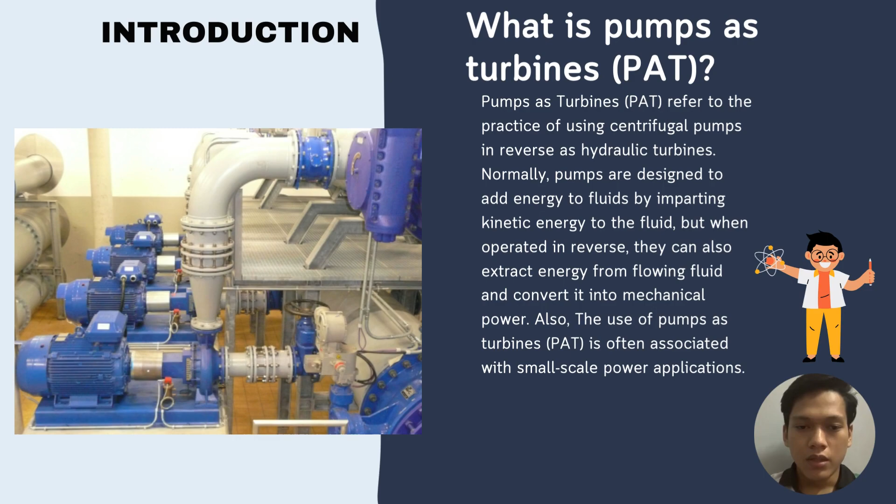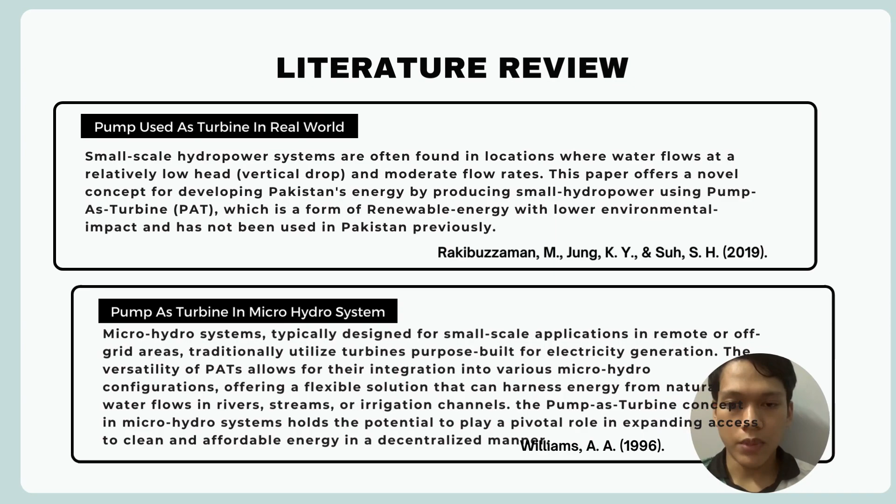For the literature review, number 1 is pump used as turbine in the real world. In the real world, small-scale hydropower systems are often found in locations with relatively low head and moderate flow rates. This paper offers a novel concept for developing Pakistan's energy by producing small hydropower using pump as turbine, a form of renewable energy with lower environmental impact that has not been used in Pakistan previously.

So as we know, pump as turbine is environmentally friendly, so it is very suitable for rural areas like Pakistan.

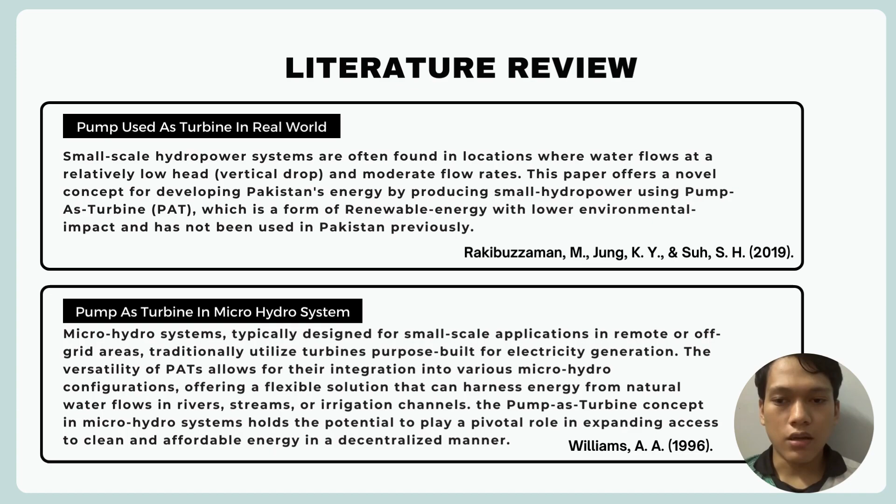Literature review number 2 is pump as turbine in micro hydro systems. Micro hydro systems are typically designed for small-scale applications in remote off-grid areas, traditionally utilizing purpose-built turbines for electricity generation. For versatility, PATs allow integration into various micro hydro configurations, offering a flexible solution that can harness energy from natural water flow like rivers, streams, or irrigation channels. So the pump as turbine concept in micro hydro systems holds the potential to play a pivotal role in expanding access to clean and affordable energy in a decentralized manner.

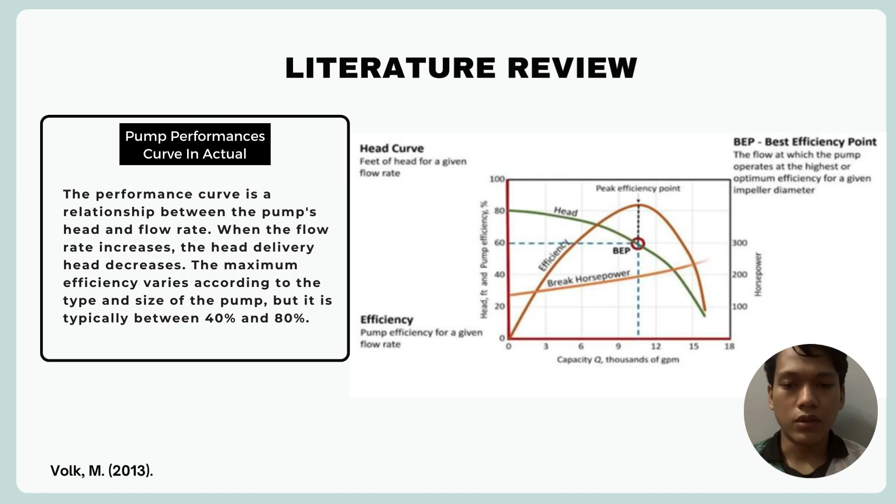Literature review number 3 is pump performance curve in actual application. The performance curve shows the relationship between the pump's head and the flow rate. As you can see in the diagram, when the flow rate increases, the delivery head decreases. The maximum efficiency varies according to the type and size of the pump. The intersection point is where the actual operating flow rate, operating head, and efficiency meet. Typically this efficiency is between 40% and 80%. This reference is from Volk M.

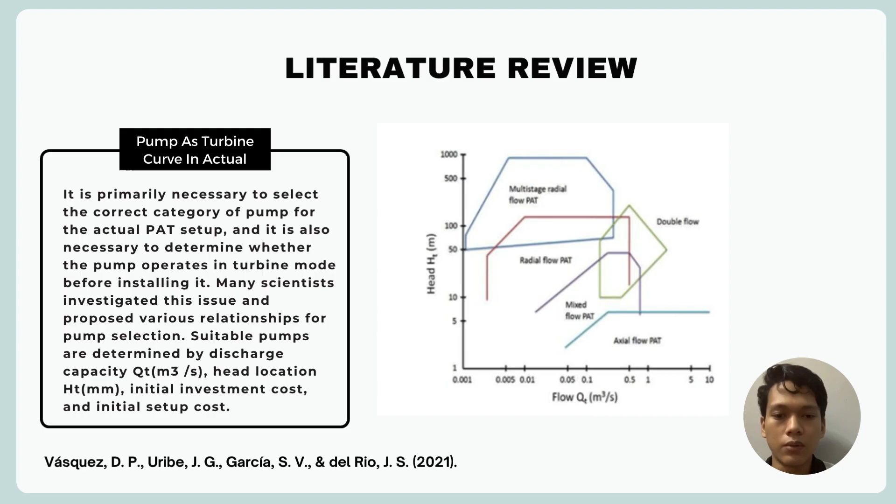Next is theory. There are two theories in our presentation. Firstly, pump as turbine is a renewable energy system idea based on cleverly reversing the standard pump function in order to capture the kinetic energy of flowing fluid for power production. So basically, we use a typical pump and change it into a turbine to produce power.

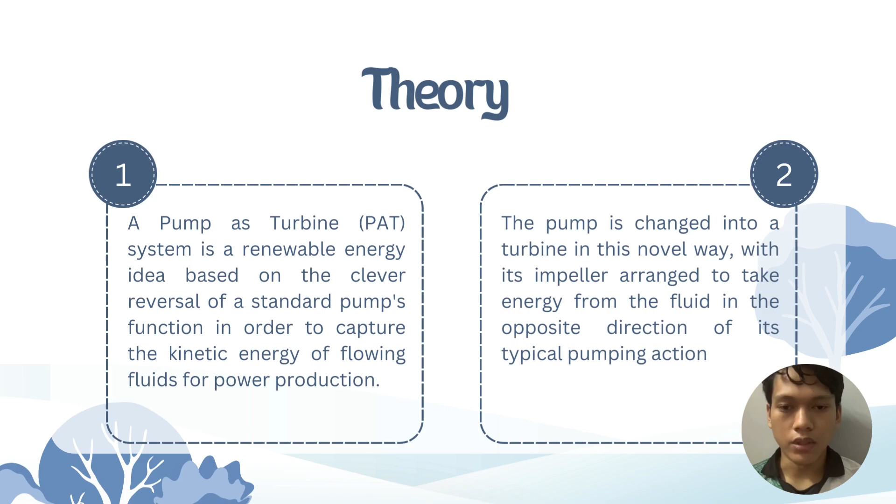The second theory is that the pump is changed into a turbine in this novel way, with its impeller arranged to take energy from the fluid in the opposite direction of its typical pumping action. Basically, in a normal pump, the fluid receives energy from the pump. But for theory number 2, we change the pump into a turbine, so the fluid gives power to the turbine, which is changed into mechanical power and then into electrical power.

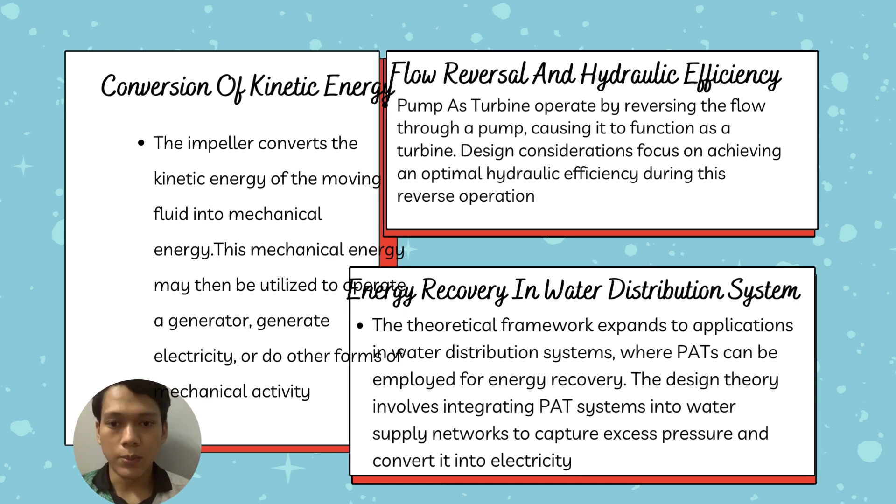So next is conversion of kinetic energy. So the impeller converts the kinetic energy of the moving fluids into mechanical energy. So this mechanical energy may then be utilized to operate a generator and then generate electricity or do other forms of mechanical activity.

So number 2 is flow reversal and hydraulic efficiency. So pump as turbine, as we know, operates by reversing the flow through a pump, so causing it to function as a turbine. So design consideration is focused on achieving optimal hydraulic efficiency during this reverse operation.

And next is energy recovery in water distribution system. So the theoretical framework expands to applications in water distribution systems where PATs can be employed for energy recovery. So the design theory involves integrating PAT systems into water supply networks to capture excess pressure and convert it into electricity.

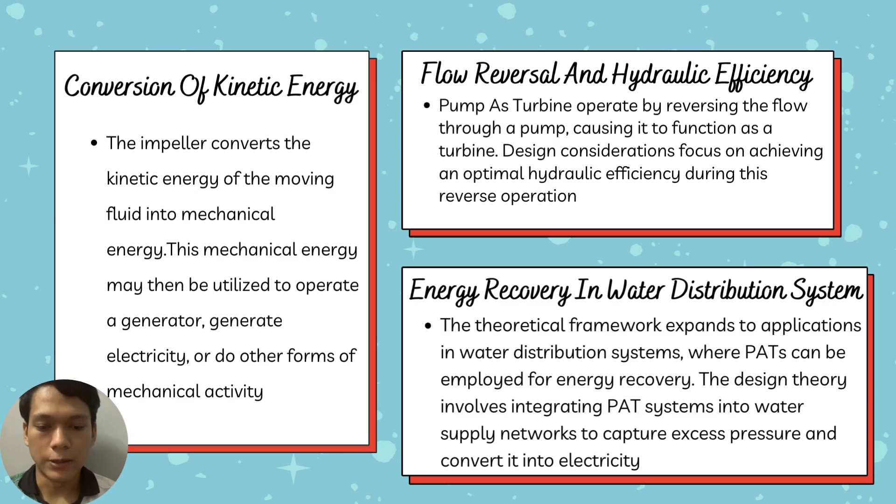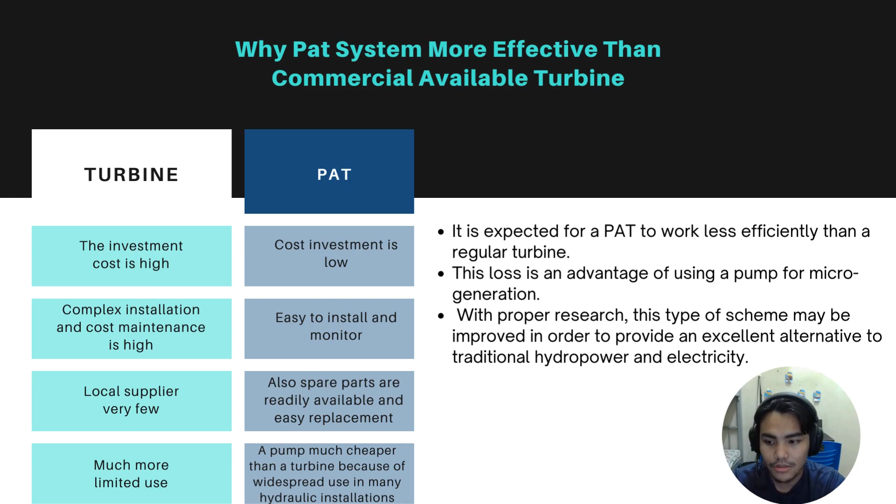For turbines, there are very few local suppliers, and a pump is much cheaper than a turbine because of its widespread use in many hydraulic installations, while the turbine has much more limited use.

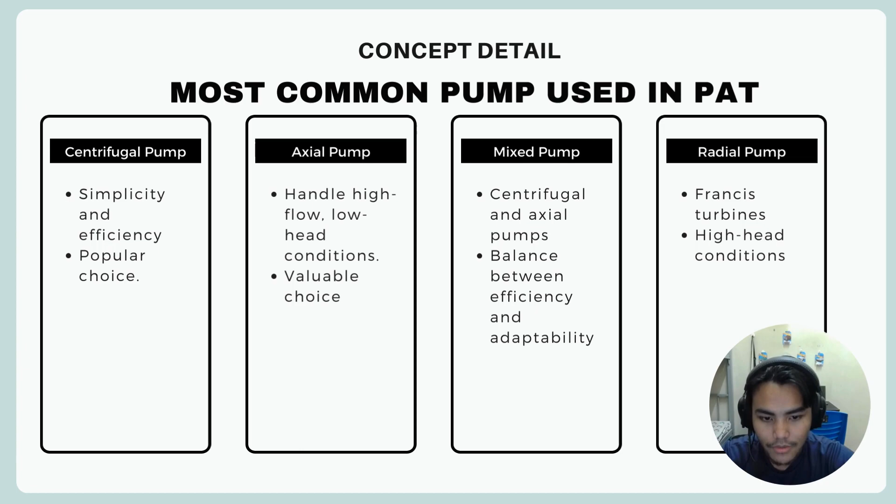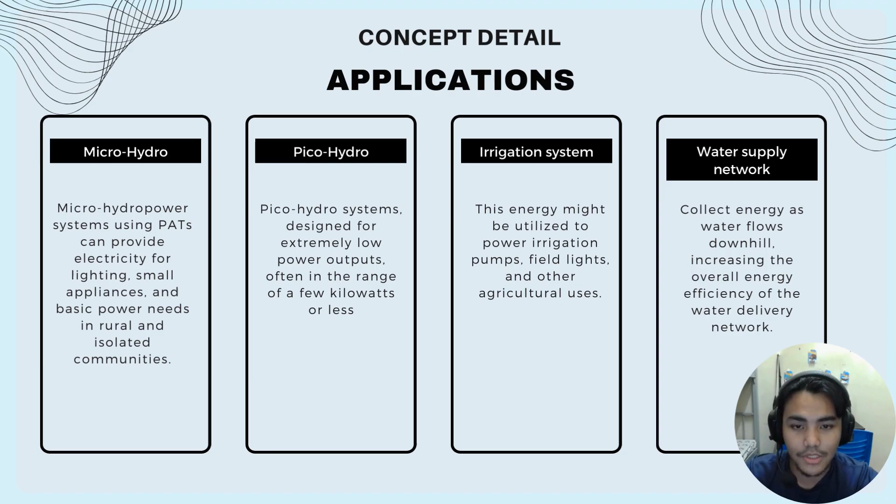So for this slide, I will talk about the applications. The first one is micro hydro, which is the primary application of PAT systems. These systems harness the power of flowing water in small-scale hydroelectric setups, providing a reliable and renewable energy source for remote or off-grid communities. The next one is pico hydro.

These systems are designed to generate power in low flow, low head conditions, making them suitable for decentralized energy solutions in rural areas. The next one is irrigation system. So for irrigation systems, as water flows through a turbine, it not only generates electricity but also aids in pressurizing water for irrigation purposes.

So the last one is water supply network. So PAT systems are increasingly being integrated into water supply networks.

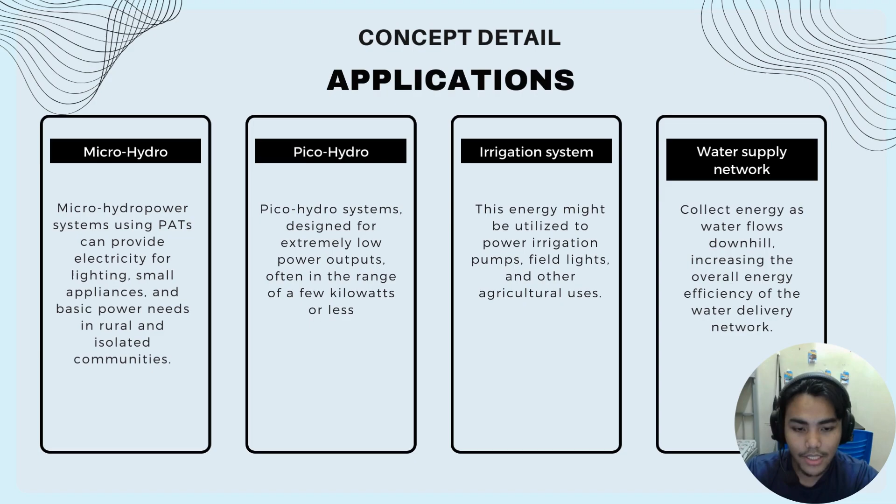The application is by harnessing excess pressure in pipelines. These systems generate electricity while maintaining a reliable water supply.

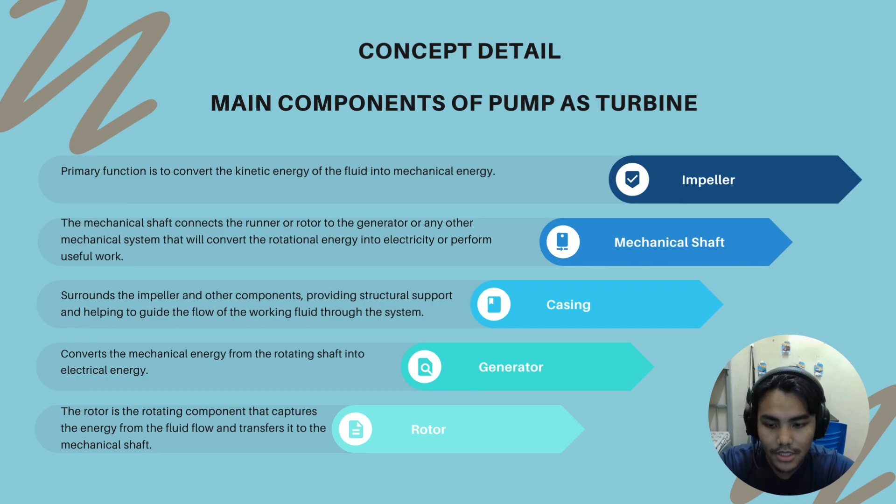The casing surrounds the impeller and other components, providing structural support and also helping to guide the flow of the working fluid through the system. The generator converts the mechanical energy from the rotating shaft into electrical energy. The rotor is the rotating component that captures the energy from the fluid flow and transfers it to the mechanical shaft.

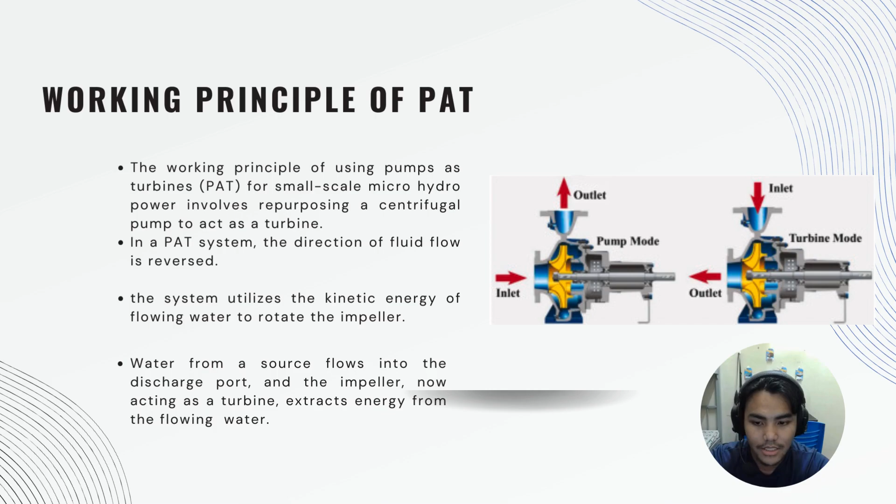So the system utilizes the kinetic energy of flowing water to rotate the impeller. Water from a source flows into the discharge port and the impeller, now acting as a turbine, extracts energy from the flowing water. For conservation of energy in PAT, as water passes through the impeller, the kinetic energy of the flowing water is converted into mechanical energy, causing the impeller to rotate. The rotation of the impeller is transferred to a shaft connected to a generator, which, as I said before, converts the mechanical energy into electrical energy.

So the impeller interaction. The impeller is a critical component of the pump, in charge of receiving kinetic energy from the moving fluid. The impeller's blades contact the water as it enters the PAT system, causing the impeller to revolve. Next is mechanical energy conversion. The rotation of the impeller converts the kinetic energy of the flowing fluid into mechanical energy. The mechanical energy generated by the impeller is then transferred to the shaft connected to a generator or other mechanical components.

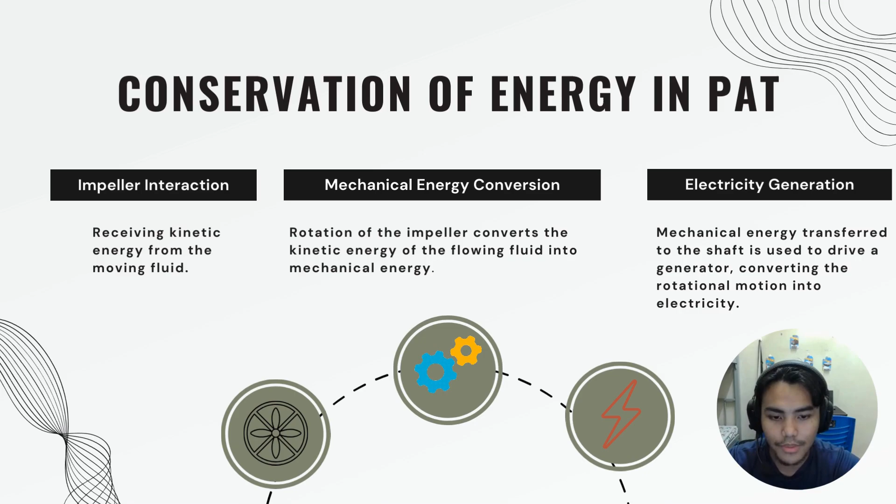The last one is electricity generation. The mechanical energy transferred to the shaft is used to drive a generator, converting the rotational motion into electricity. Alternatively, the mechanical energy can be employed to perform various types of mechanical work depending on the specific applications.

My name is Madison. For the project detail, in this project, we designed a pump as turbine using a centrifugal pump. As we can see in the picture, this one is the generator, fitted to the pump at the inlet and the outlet. The pump is the main component used in this project. The use of a centrifugal pump as turbine may minimize the installation cost.

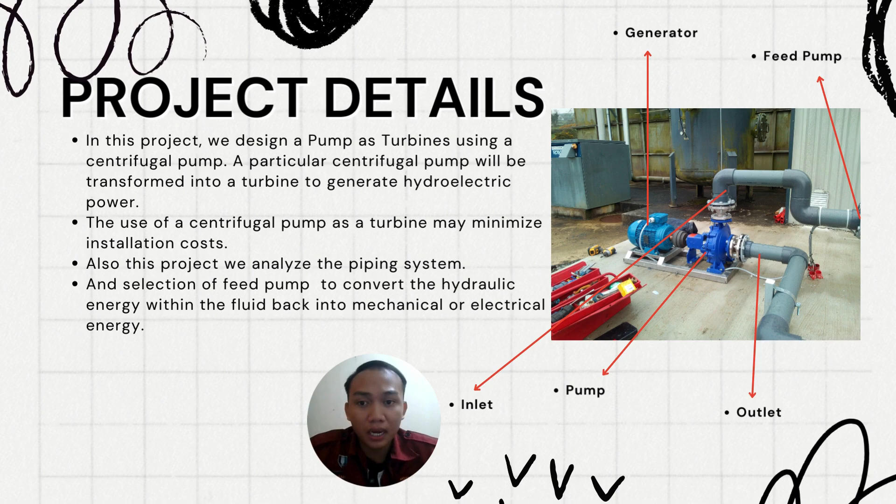Also, in this project we analyze the piping system and the selection of the pump, which as I mentioned before is to convert the hydraulic energy within the fluid into mechanical or electrical energy. We go through the performance equation. So this is our designed pipeline system for a small-scale pump as turbine that we apply in our project.

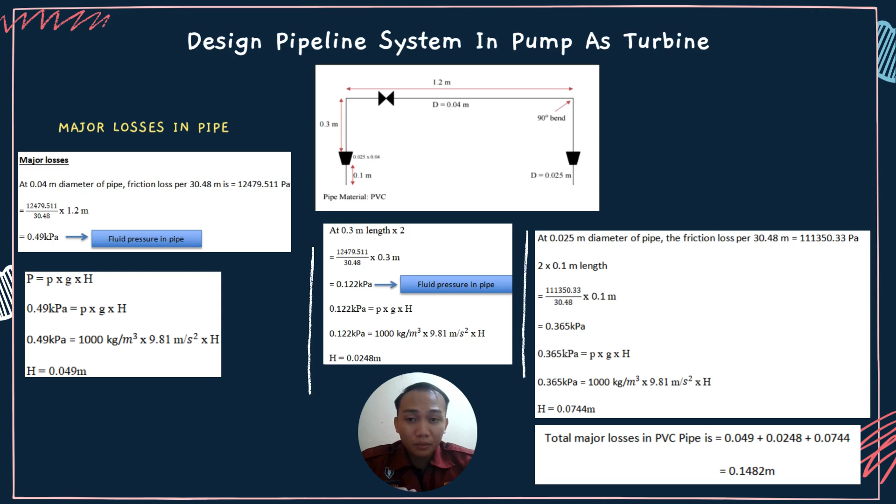First, we calculate the major losses that occur in our pipeline system. For this pipeline system, we use PVC pipe as our experimental setup, taken from the case study. First, we calculate the head of the pipe using the formula P = ρgh, and after that, we calculate the total major losses in the PVC pipe, which we get as 0.1482 meter.

Then the minor losses in the pipe: the pump piping system has two 90-degree bends, so loss occurs at fittings, including the expansion in the pipe. The head loss at the expansion fitting that we calculate is 0.152 meter using the head loss equation, and to determine the velocity, it is equal to flow rate divided by area.

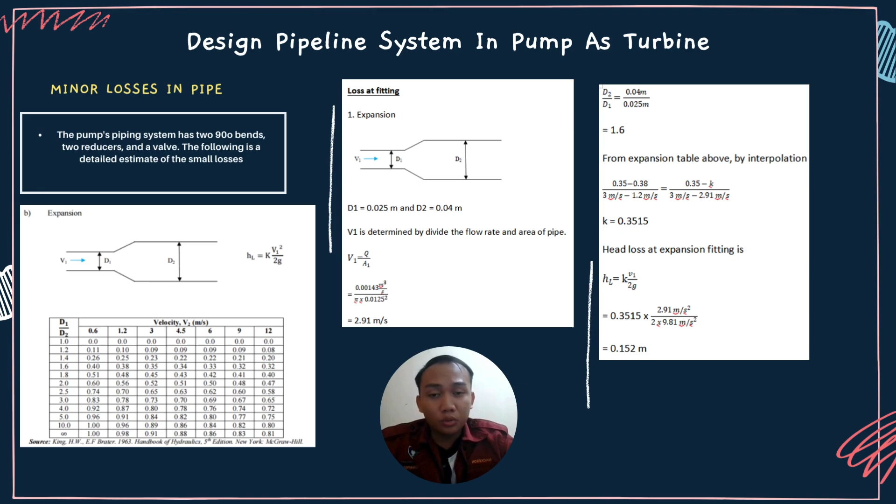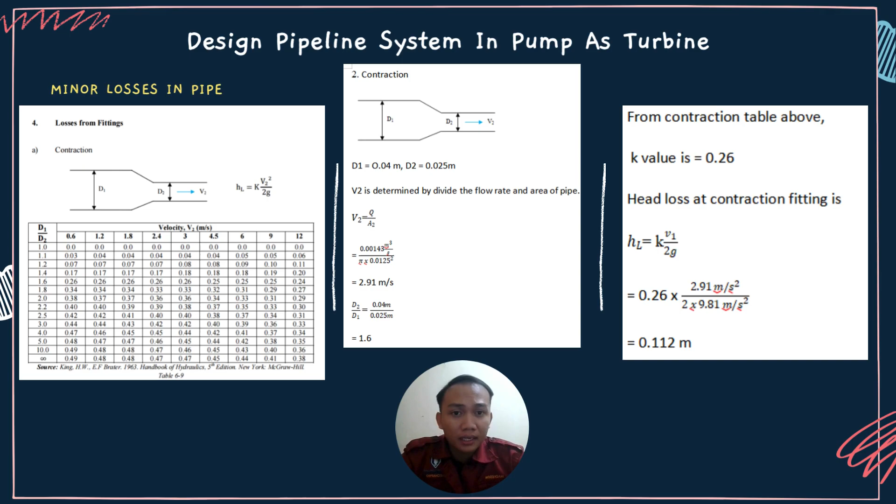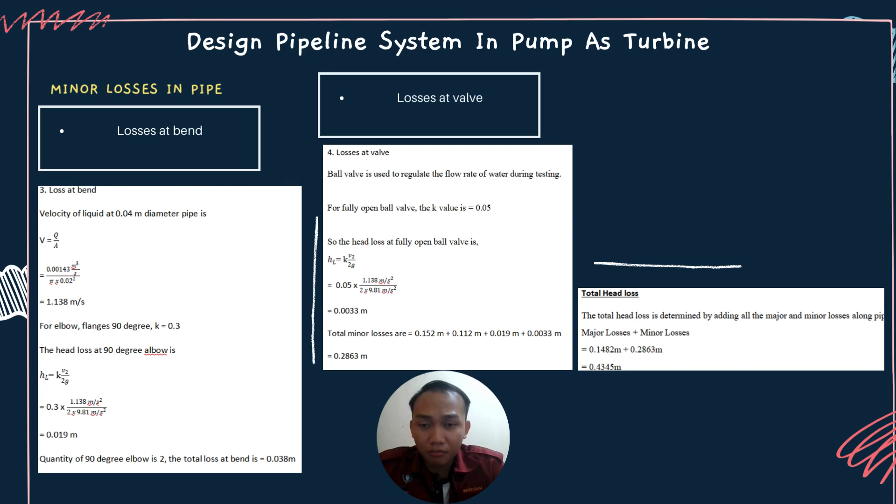Next, we calculate the loss from fitting and contraction in the pipe, using the same formula that we apply to calculate the expansion in the pipe. The head loss at the contraction fitting that we calculate is 0.112 meter. Next are other minor losses in the pipe, which are losses at bends and losses at valves. So the total head loss is determined by adding all the major and minor losses along the pipe, and we get 0.4345 meter in our pipeline system.

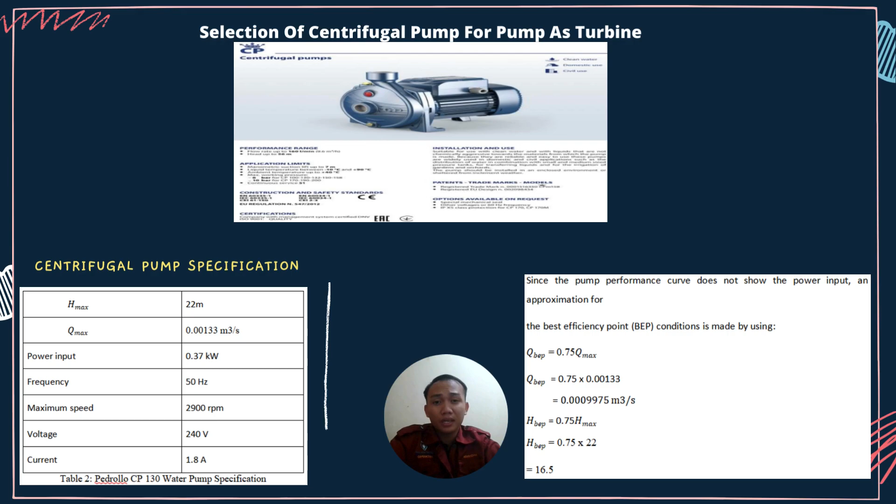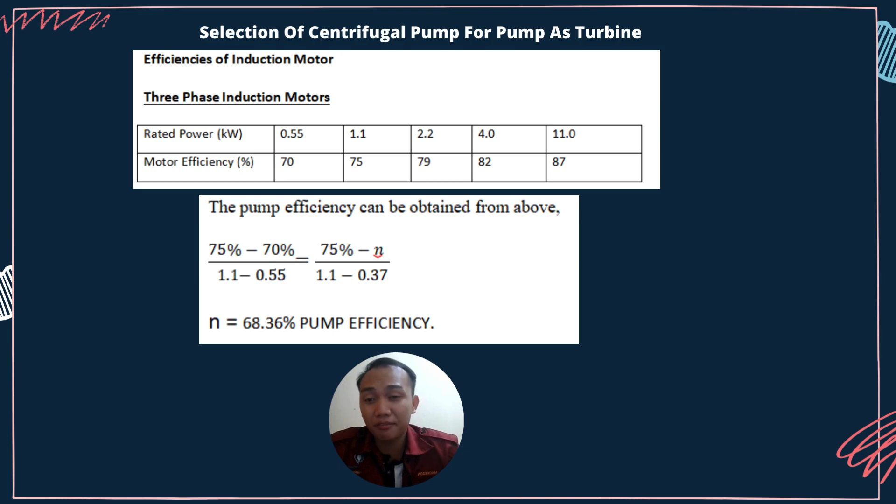Next is the selection of a centrifugal pump for pump as turbine. The model of centrifugal pump that we use is the Pedrollo CP 130 water pump. The flow rate at best efficiency point that we get is 0.0009975 cubic meter per second, and the head at best efficiency point that we calculate is 16.5. For the pump efficiency, we use a motor efficiency of 75 and rated power of 1.1 kilowatt. After we substitute all the values, we get a pump efficiency of 68.36.

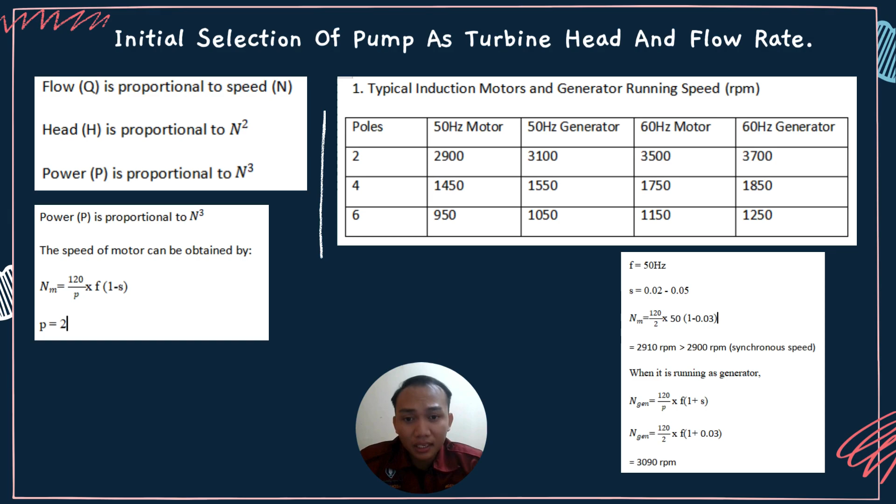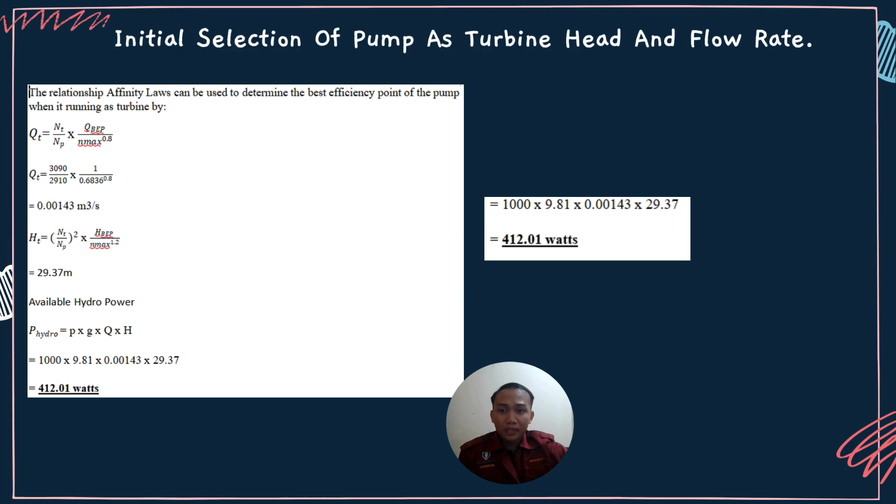Next is the initial selection of pump as turbine head and flow rate. The power is proportional to n power 3. So the speed of the motor that we obtain is 2910 rpm, and when it's running as a generator, the speed of the generator that we calculate is 3090 rpm. Next is the relationship of the affinity law that we use to determine the best efficiency point of the pump when it is running as a turbine, and we get the head of the turbine as 29.37 meter. So the available hydropower that we calculate is 412.01 watts.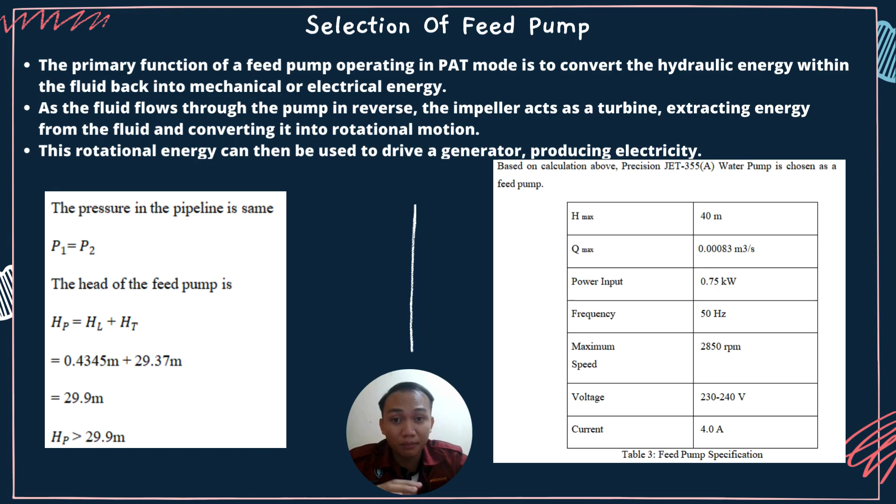Next is the selection of the feed pump. In this project, the feed pump that we use is the Precision JET-355(A). The primary function of the feed pump in PAT mode is to convert the hydraulic energy within the fluid into mechanical or electrical energy. As the fluid flow through the pump is reversed, the impeller acts as the turbine, extracting energy from the fluid and converting it into rotational motion. This rotational energy can be used to drive a generator and produce electricity.

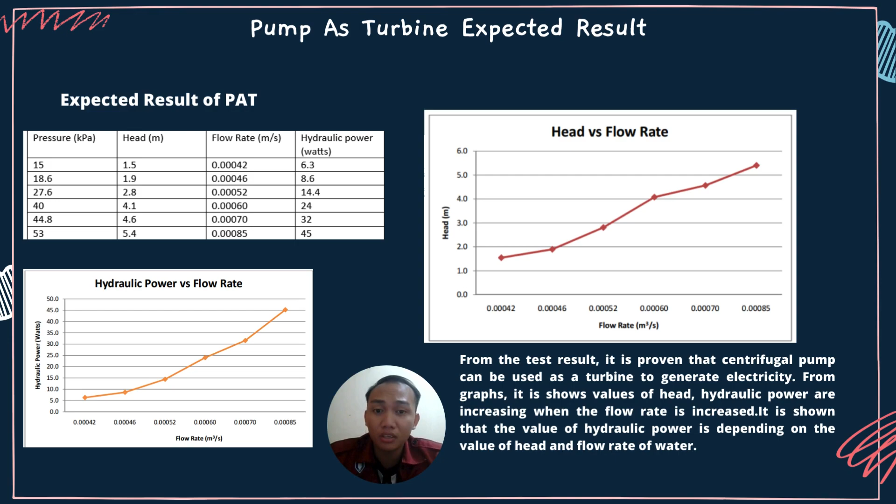Next is the pump as turbine expected result. From the test result, it's proven that a centrifugal pump can be used as a turbine to generate electricity. From the graph, it is shown that the values of head and hydraulic power are increasing when the flow rate is increased. It also shows that the value of hydraulic power depends on the value of the head and the flow rate of the water.

So we continue to the economic part. This is important to enhance the economic feasibility and sustainability of this project. The first point is long-term cost consideration. It can be achieved by developing a long-term financial plan that includes budgeting for maintenance, repairs, and potential system upgrades. This helps ensure the economic sustainability of the pump as turbine project over its life cycle. The second one is electricity tariff and revenue generation. We must explore available government incentives, subsidies, or grants for renewable energy projects. Many governments offer financial support to promote the adoption of sustainable technologies.

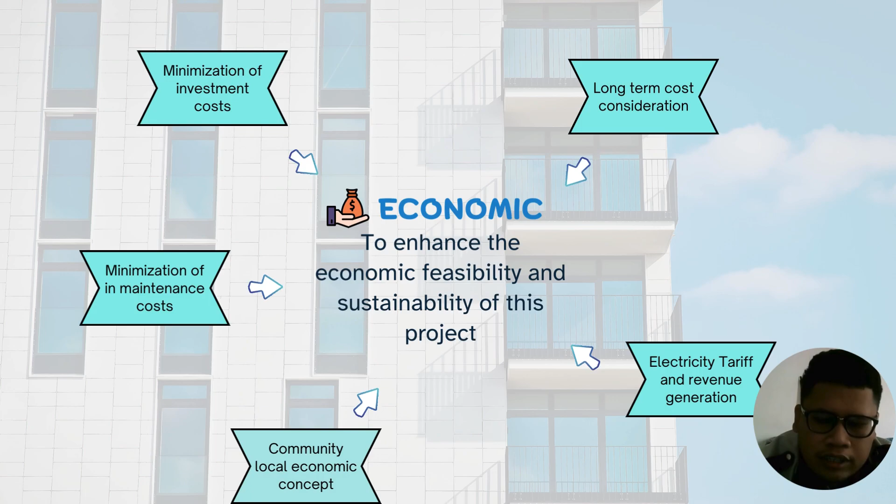Next is the community local economic concept. It involves local communities in the planning, implementation, and management of the PAT project. Community engagement fosters a sense of ownership and ensures the project aligns with the community's needs and priorities. The next one is minimization of maintenance costs. We can achieve that by implementing a remote monitoring and control system to facilitate real-time performance tracking. This allows for early detection of issues, proactive maintenance, and optimization of the PAT system efficiency. Lastly is the minimization of investment costs. We can get it by exploring innovative financing models such as public-private partnerships, community-based funding, or crowdfunding to secure the necessary capital for the project.

Okay, we continue to the pros of the pump as turbine. The first one is energy recovery, where it can be used in applications where fluid is being pumped, to capture energy that would otherwise be wasted during the braking process. The next one is environmental impact, making them more energy efficient. And also the pump as turbine does not release any waste to the environment. The third one is cost effective, because a pump as turbine is more affordable and less expensive than traditional turbines.

Lastly, the design is simple. The pump as turbine design is simpler than the traditional turbine design, so it leads to easier maintenance and lower manufacturing costs.

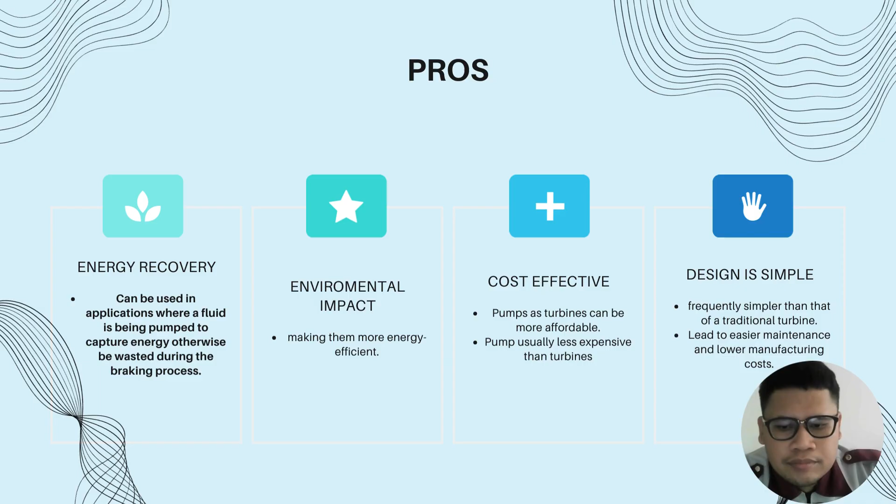So we move from the pros to the cons of the pump as turbine. Okay, the first one is lower efficiency. As we know, when combined, the pump and turbine typically have lower efficiency. Second one is cavitation risk. It will result in cavitation, which may harm the pump's internal parts.

Cavitation will occur when the liquid in a pump turns to a vapor at low pressure. It occurs because there is not enough pressure at the suction end of the pump, or insufficient net positive suction head. When cavitation takes place, air bubbles are created at low pressure. So when we combine the pump and turbine together, cavitation will occur.

Next is the limited performance analysis. It occurs because pump as turbine is not widely used in the industry, so it's challenging to predict their performance accurately. Lastly is the limited flow range. It's limited because of the limited operating range compared to turbines or the old turbines.

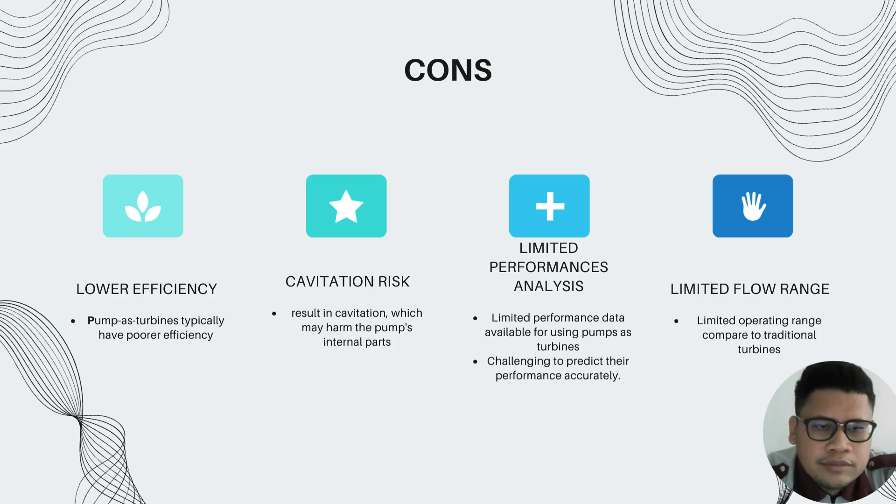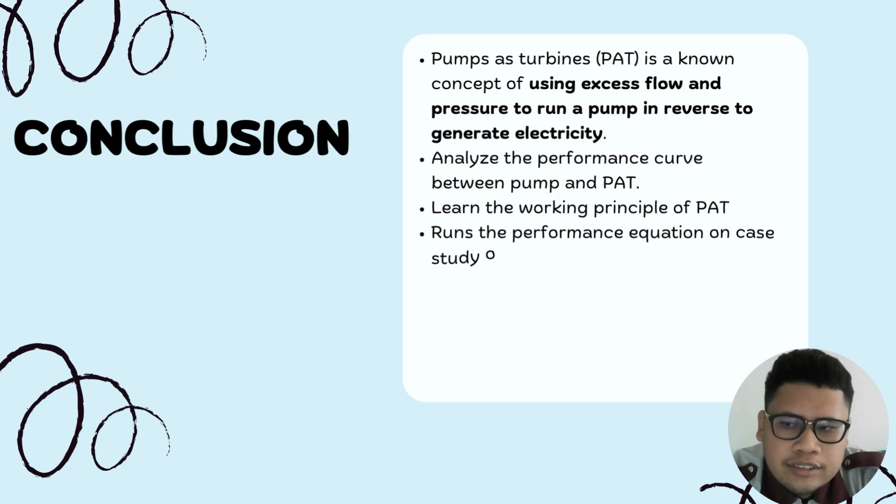So we move to the conclusion of our project. Okay, the first one is the pumps as turbines. PAT is a known concept of using excess flow and pressure to run a pump in reverse to generate electricity. And then we have analyzed the performance curve between the pump and the pump as turbine.

In summary, analyzing the performance curve between a pump and PAT involves understanding the characteristics of both devices, their individual performance curves, and identifying operating points for efficient energy conversion. This integration is valuable for energy recovery and also optimization in various applications.

Okay, the third one is we have learned the working principle of PAT and then ran the performance equation on a case study of pump as turbine in small scale. And next is we analyzed the economics of the pump as turbine industry.

So a comprehensive economic analysis in the pump as turbine industry involves evaluating capital and operational costs, assessing energy savings, calculating the return on investment, considering life cycle costs, addressing risks, and ensuring compliance with regulations. The decision based on these factors is crucial for the successful deployment and economic viability of a pump as turbine system. Last but not least, we investigated the pros and cons of PAT in real world applications.

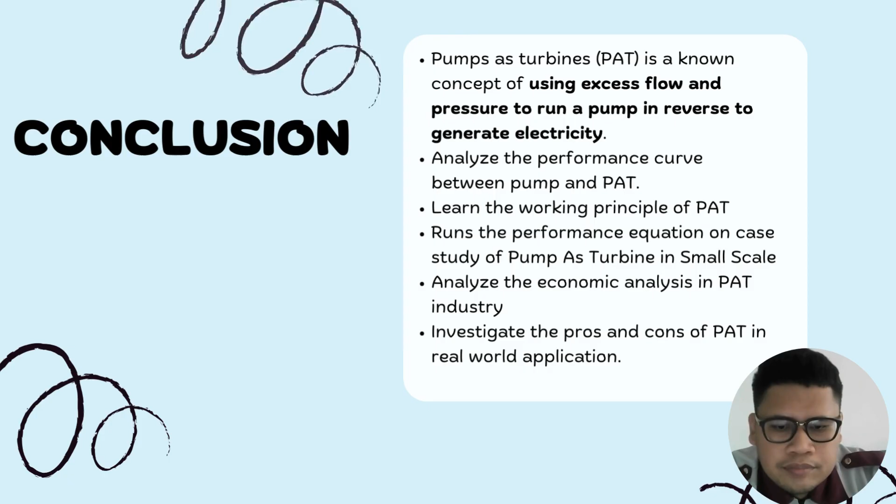So, while a pump as turbine system offers several benefits, it's essential to conduct a thorough feasibility study to ensure that the specific conditions of the remote area are suitable for this technology. Factors such as water availability, terrain, and community needs should be carefully considered in the planning and implementation of PAT projects in remote areas. Okay, next is question 2.

How does a pump as a turbine work? So as shown earlier in this presentation, the water flows through the pump in the opposite direction compared to its typical operation, which is reversible flow. And the last question is: where are pumps as turbines commonly used?

Okay, pumps as turbines are commonly used in small scale hydropower applications, such as micro hydroelectric systems and water supply networks. Other examples of the use of PAT in the industry are irrigation systems, industrial processes, wastewater treatment plants, mining operations, aquaculture and fish farms, micro and pico hydropower projects, community-based renewable energy projects, water pipelines and networks, and lastly, decentralized energy generation.

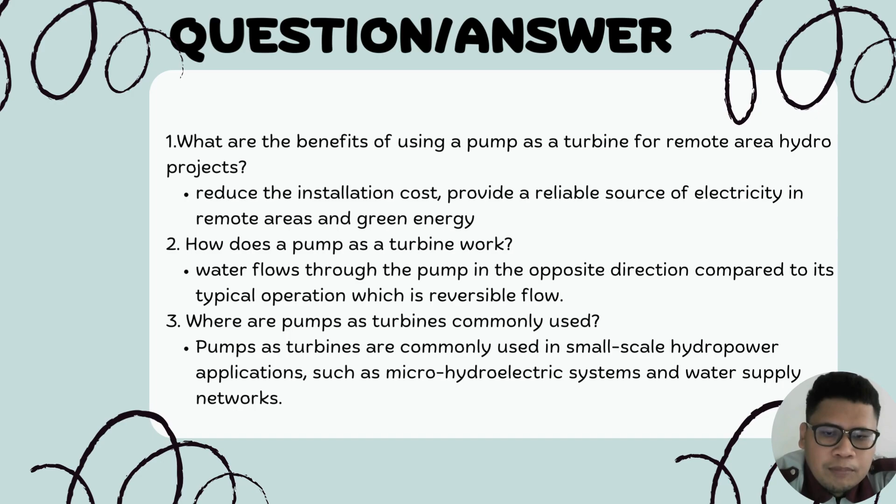We hope that the pump as turbine will be widely used in industry in the future.